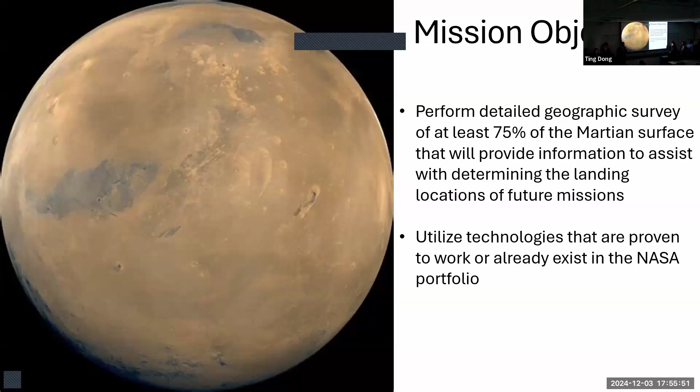Our mission objective is to perform a detailed geographic survey of at least 75% of the Martian surface that will provide information for future missions, primarily future manned missions, to choose landing locations. We are also abiding by AIAA's request for proposal, utilizing technologies that have been proven to work so that our mission will have a chance of success.

Our mission constraints are that our mission must not exceed $1 billion US. This includes the cost of materials, costs of testing, costs of launching, and costs of fuel, to ensure that our data will actually be helpful for future manned missions, when we intend to complete all of our measurements by December 31st, 2033. Our mission should remain operational at least until the late 2030s.

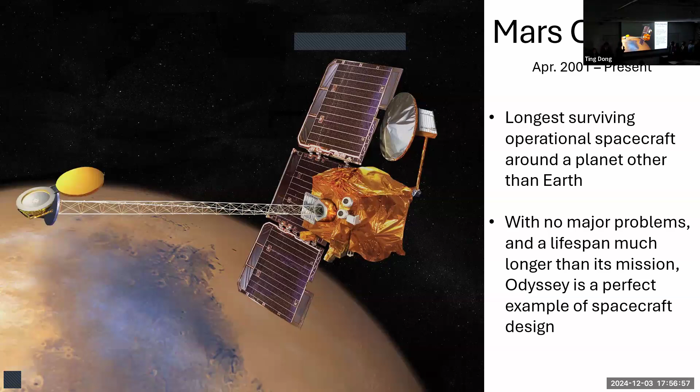Odyssey is one mission that we took inspiration from, as it is in continual orbit today. It is the longest surviving operational spacecraft around a planet other than Earth. Mars Odyssey doesn't really seem to have an end of life, and with the design of our spacecraft, we're hoping that it can outlast Mars Odyssey and provide extra information to Earth past its mission date.

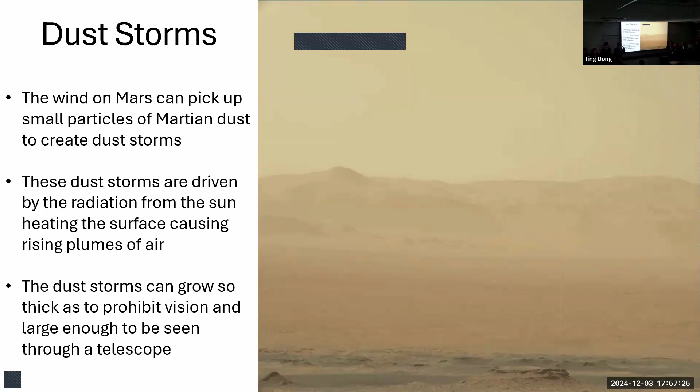Storms are probably the biggest hazard to our mission. The winds on Mars can pick up small particles of dust and fling them around, creating dust storms which impact visibility. This is going to be an issue for us since we are surveying the Martian surface from our satellite. These dust storms are driven basically by the same thing that drives them on Earth: solar radiation heats up the ground, causing warm and cold air to move and create wind.

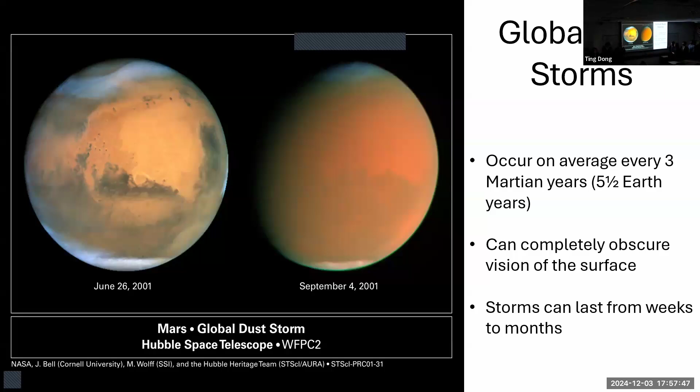These dust storms can grow significantly large, to the point of obscuring the entirety of the Martian surface. These global dust storms seem to occur on average every 3 Martian years, or 5.5 Earth years, and can last from weeks to months. This is why we plan to launch as soon as possible, so that when the dust storm does occur, we still have enough time to take all of our data.

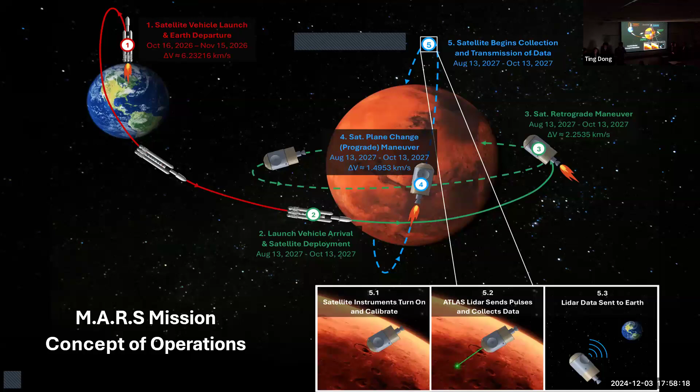We plan to launch from Earth in 2026, arrive at Mars sometime in 2027, perform a burn to slow us down and get us into Martian orbit, and from there a secondary burn to get us into our final orbit, where we will collect data using a LiDAR, a laser imaging device, which will shoot a laser down, the laser will bounce back, and we'll send that LiDAR data to Earth to get a topographical map of Mars.

So I'll be talking about the interplanetary trajectory. This will deal with anything from launch to getting into the correct parking orbit that we'll be using to measure with the LiDAR.

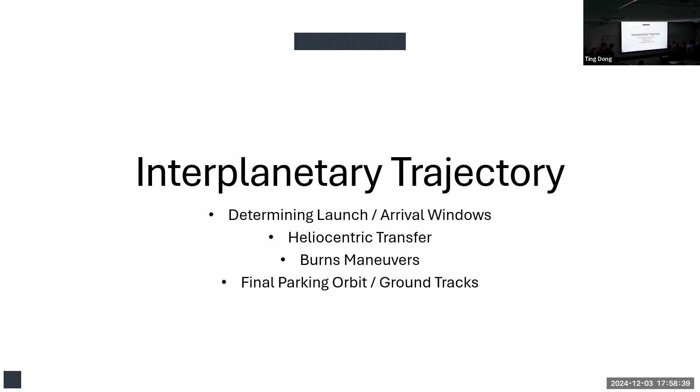We'll be performing a heliocentric transfer first to go from launch to reach Mars. Some considerations we had for this were the time required to achieve arrival, and then having enough time to actually fulfill the mission. Also the overall delta V, since a greater delta V means more fuel, along with the time range.

We decided on using the Falcon Heavy. We were originally deciding on the Falcon 9, but the payload happened to have a weight larger than what it could carry, so we used the Falcon Heavy, and it still remains one of the lowest costs for reaching Mars.

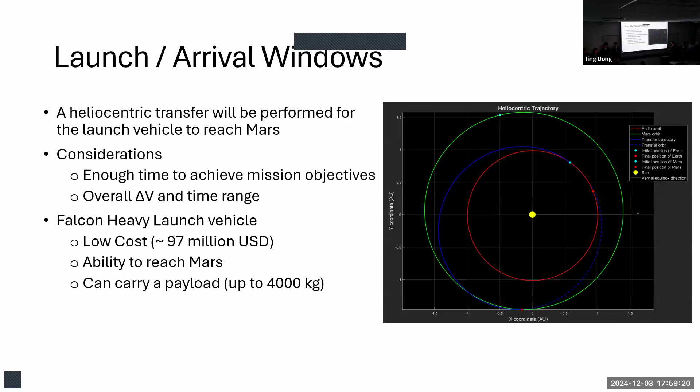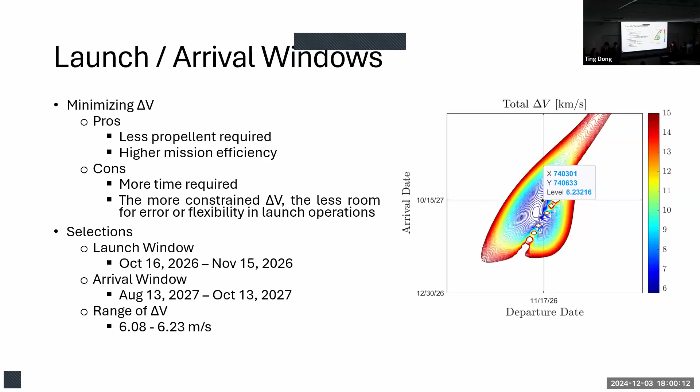On top of that, we have to have an arrival date a bit later than the earliest possible, because we decided on a larger contour. We had a launch window between October 16th and November 15th of 2026, and an arrival window between August 13th and October 13th of 2027. Our delta V's range from 6.08 to 6.23 kilometers per second, and we did most of our calculations using 6.23, since that's the worst case scenario.

So after we arrive at Mars, we'll have to transfer from a hyperbolic trajectory into a circular orbit.

We decided on a distance of 3,546.2 kilometers from Mars, or 150 kilometers from the surface. So our first delta V is going to be a retrograde maneuver, calculated using the speed at the hyperbolic trajectory at that desired distance for our parking orbit, minus the speed that we'll have within our circular orbit.

We will be performing a plane change maneuver to get into the right plane, so it's the most efficient and able to capture the most data the fastest. We'll be changing our plane from whatever our current orbit is into one that intersects with Mars's axis of rotation. We're assuming we're in the equatorial plane, since we don't know the exact plane we're in due to using patched conics, but we also considered the maximum inclination angle possible, which is 24.9 degrees. From those calculations, we got a delta V of 1.5 kilometers per second.

So our largest delta V is going to be in the retrograde maneuver.

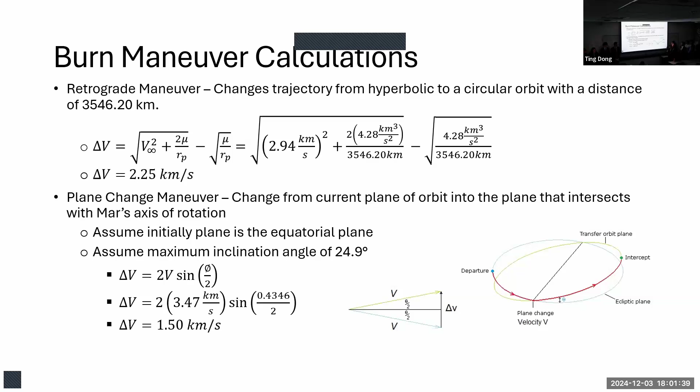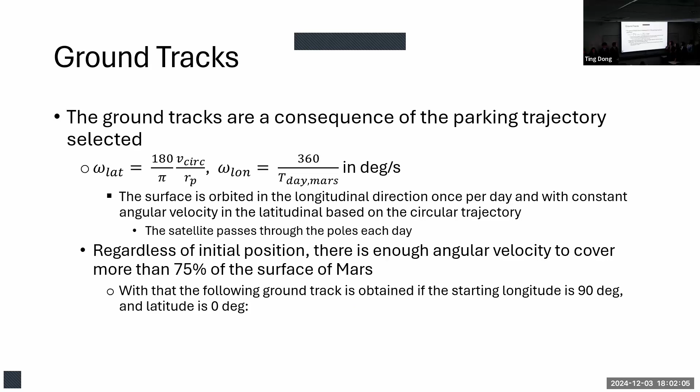For the ground tracks, we used the angular velocity in the latitude direction, which is the speed from the satellite, and the angular velocity in the longitudinal direction, which is the speed of the planet rotating about its axis. Using this, we found our satellite would be orbiting Mars around 14 times a day. Because of this, we can now see the ground tracks, and our mission of covering 75% will be covered well before the 2-year mark.

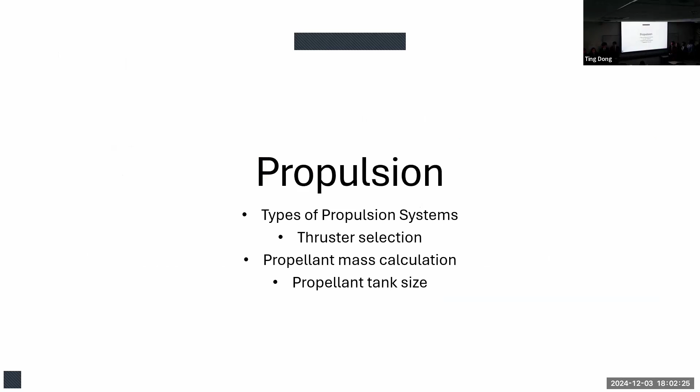Now I'll go over the propulsion systems for our mission. We'll be using two types of propulsion systems: a chemical one for the maneuver to lower the orbit as well as the plane change, because it has a high thrust impulse and is able to do rapid movements. We'll also be using electrical propulsion to make small adjustments throughout the mission after the satellite is in the parking orbit.

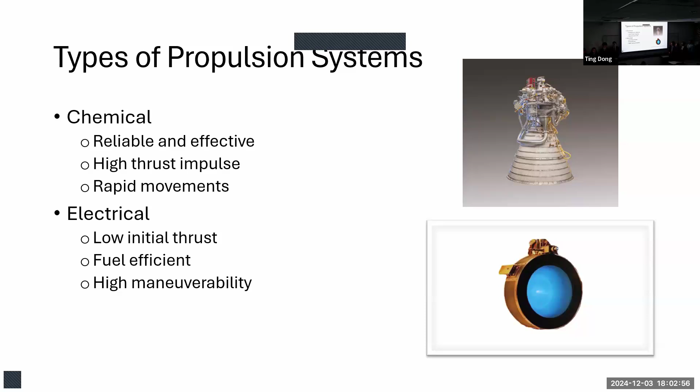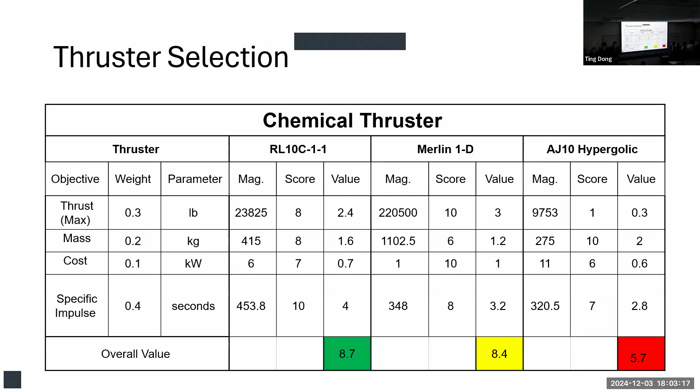For the chemical thruster, we compared the RL10C1, the Merlin 1D, and the AJ10 in terms of thrust, maximum thrust, mass, cost, and specific impulse. We determined that for our mission and the delta Vs calculated previously, the RL10C1 would be the best option. For the electrical ion thruster, we compared the NEXT, the NSTAR, and the BIT-3 on the same parameters, and concluded that for small adjustments, the NEXT would be more viable.

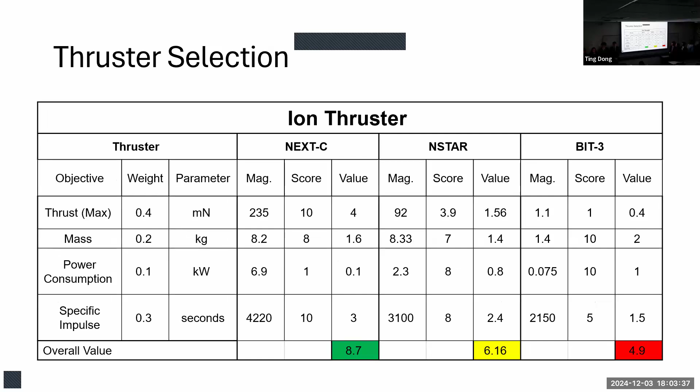Since we're using the RL10C, it uses a bipropellant system of hydrogen and oxygen. Knowing the mass of the satellite without fuel, as well as the delta V required and the specific impulse it provides, we calculated the mass of the propellant, and from there determined the mass for both the hydrogen and the oxygen.

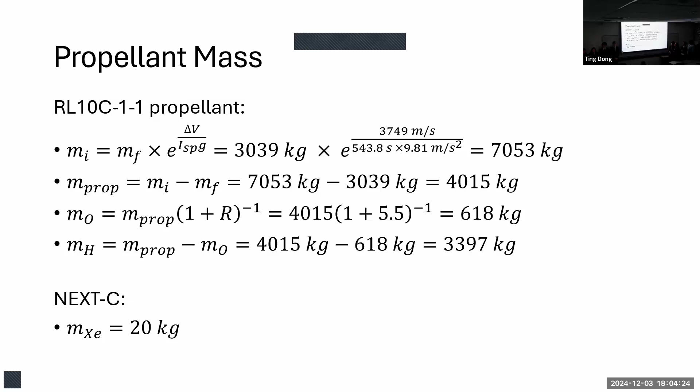For the NEXT-C, it uses xenon as the propellant, and comparing to other uses of this thruster, we determined that a mass of 20 kilograms would be enough for the length of our mission. From there, we calculated the propellant tank sizes we'll be using, which will be described further in the next section.

Now for the structural configuration, we ended up choosing a skin stringer configuration, as it allowed us to have the maximum possible spacing inside, and it has the best structural capabilities. We chose magnesium alloy due to its low density and high stiffness compared to other materials like aluminum.

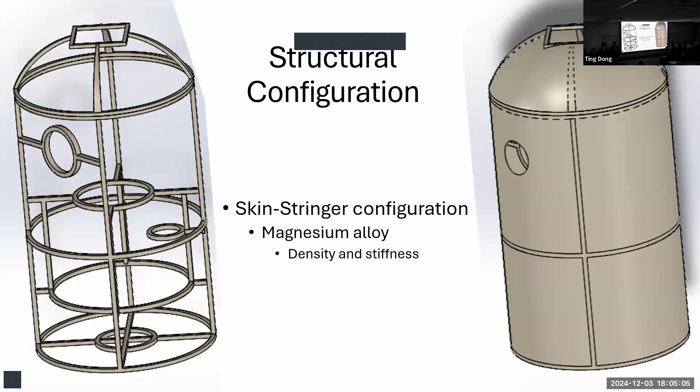Going back to the configuration for thrusters and propellant, we chose to have 3 tanks. The biggest one, on the bottom, is the liquid hydrogen tank; the smallest sphere is the liquid oxygen tank; and the other big sphere is the xenon tank. All three are made of carbon fiber with a thickness of around 5 millimeters. For the thrusters, the main thruster was located at the bottom of the satellite, and the two ion thrusters were located at special points, right at the connection between the hoop frame and the stringer, for better overall performance.

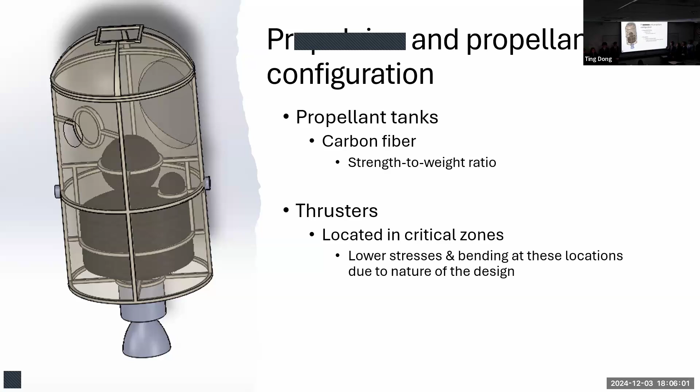Now, when talking about the nuclear reactor or the KRUSTY, this reactor has a mass very high for the radioactive mass, and that offsets our center of mass to around a third of the total height of the reactor. Because of this, we created a beam in between the stringers that would connect at that exact point to avoid any torsional stresses.

This also allowed us to have a better overall, easier connection to the radiator after this. To further on this, we're going to use a PAN graphite felt sheet to insulate this reactor from the overall frame.

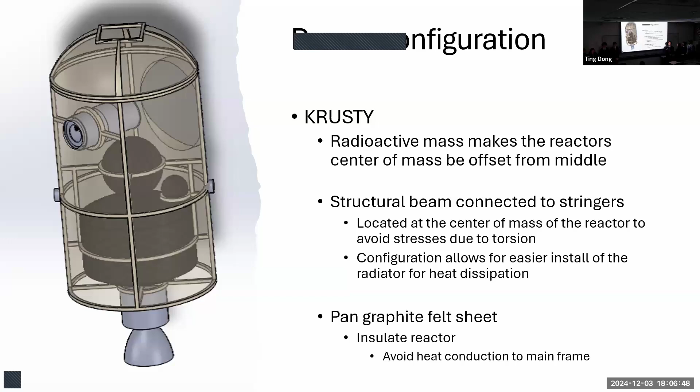Now, for the thermal configuration, as I said before, we're going to use the PAN graphite felt to insulate the reactor itself. We're also going to use some ceramic tape. Then ceramic spacers are going to be used between the actual radiator that's going to be connected to both the KRUSTY and the two ion thrusters.

Also, we're going to have a second radiator that's going to be attached to the bottom of the satellite. This radiator is going to be only for the RL10C, and it's only to avoid heat conduction to the main frame. Both of them are going to be made out of aluminum due to its good thermal dissipation, low absorptivity, and low density.

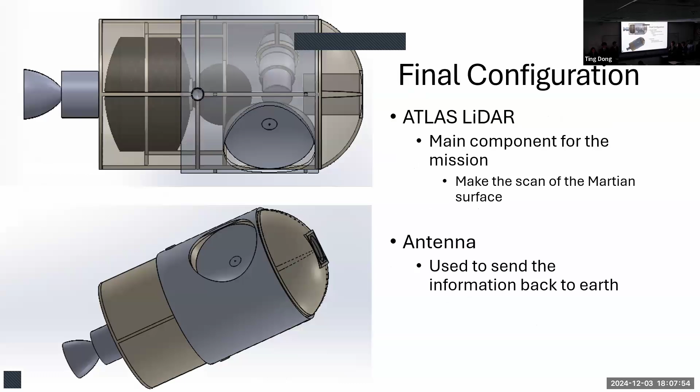Finally, we have the final configuration, which has the ATLAS LiDAR on the top. This is going to be, as said before, used to do all the mapping that we need, and the antenna used to communicate that information back to Earth. This is the overall configuration.

For that reason, we decided to weld the LiDAR to the frame shown here, to help prevent any shifting, because any shifting can cause the laser to shoot at a different angle than we might be expecting, and affect the data that we collected. Next, the antenna will also be welded for much the same reasons, to ensure consistent communication to the satellite.

Also, the large surface area through which it would be welded was chosen over bolting, since bolting might require a large amount of bolts, which would create stress concentrations.

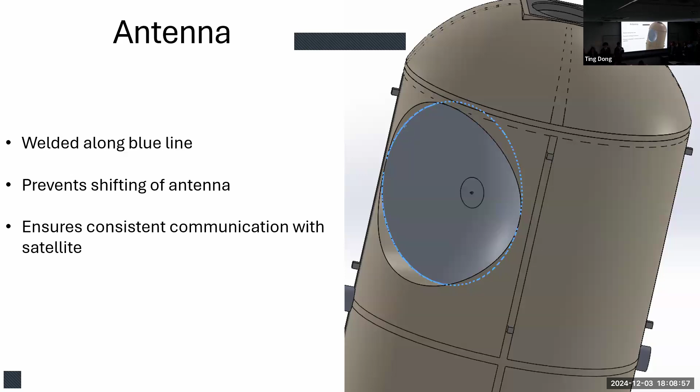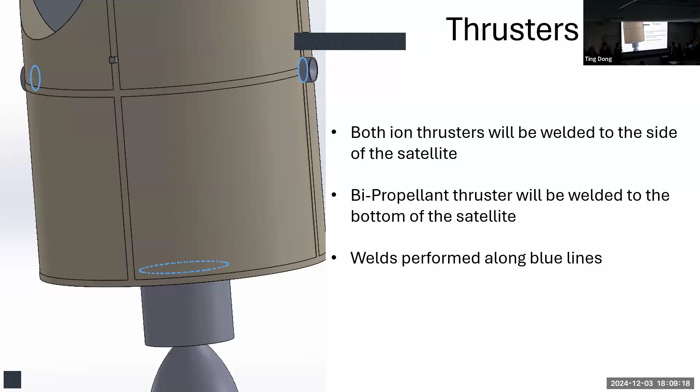The KRUSTY, because of the large amount of heat it passes, will not be welded directly. Instead, a frame will be welded onto the surface of the satellite, and then ceramic bolts will be driven through the circular frame and into a nut, which is welded onto the KRUSTY. This is to ensure that there is minimal heat transfer between the KRUSTY and the frame of the satellite.

The radiator is directly welded to the KRUSTY for the same reason, but in reverse, to ensure maximum heat transfer from the KRUSTY to the radiator, so that the radiator can do its job.

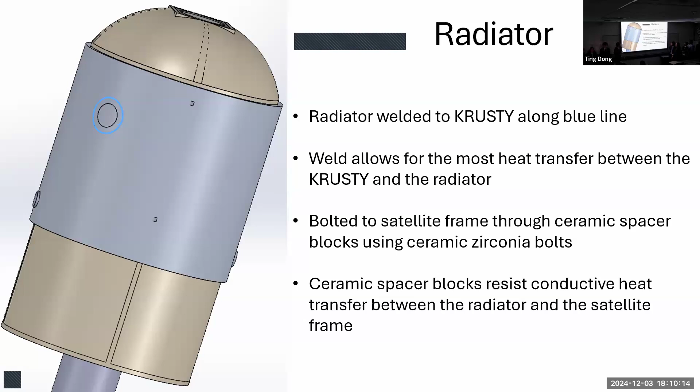The radiator, in order to stay in its position, will not only be welded to the KRUSTY, but small ceramic spacers will be placed between it and the frame and bolted through with, again, a ceramic bolt, to ensure that the heat transfer does not go into the frame.

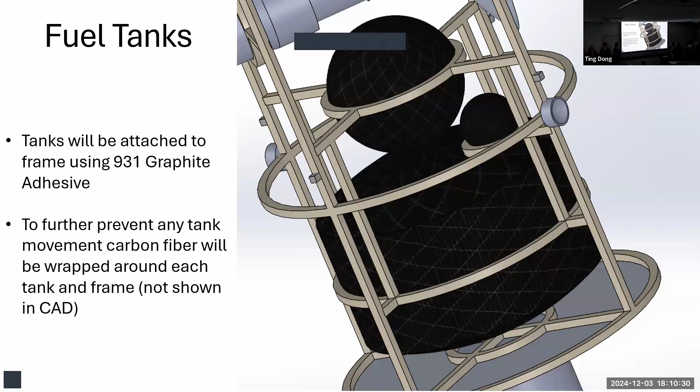The fuel tanks will be attached to the frame using a 931 graphite adhesive. To further prevent any tank movement, rather than just rely on the adhesive, fiber will be wrapped around the frame and the tank itself to make sure it holds in place.

Finally, the satellite skin will be attached to the satellite frame using rivets. This is basically just to prevent sunlight and debris from entering the interior of the satellite. The rivets are basically just a handy way of doing that without having to use welding or anything else, which is used extensively in the aerospace industry.

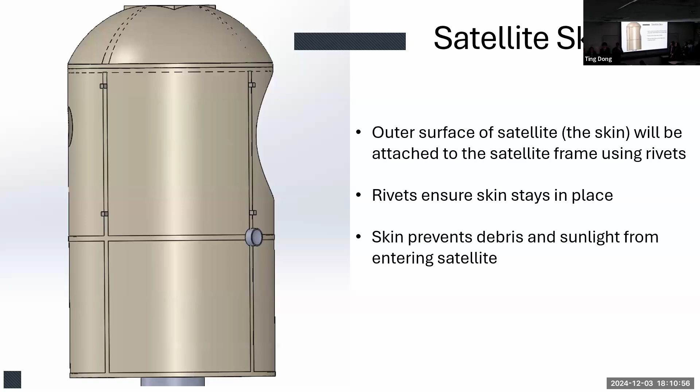So for structural analysis, we'll be talking mainly about the stresses conducted during the burns. The satellite undergoes the highest stresses during the burn maneuvers. We'll be focusing on both of them, but particularly the first one, since that happens to have a larger delta V. We'll also be focusing on the supporting beams attached to the thruster, since they're the part of the structure closest to the thruster, so they'll probably be the ones that endure the most stress.

We'll also be thinking about progressive failure, so from the first burn to the second burn, anything such as deformation that could cause new stresses to be introduced during the second burn.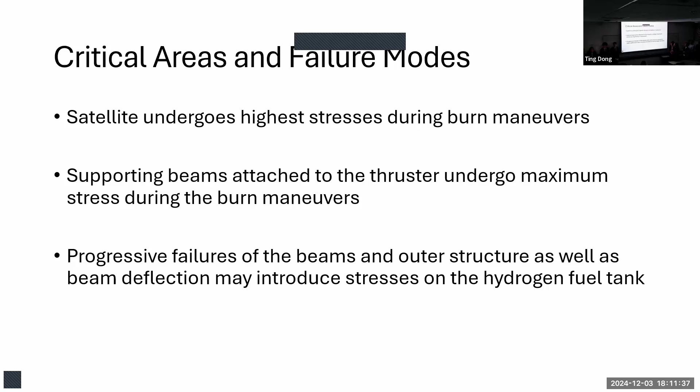One really critical location is on the supporting beams, exactly where the thruster attaches to the frame. Right there we have a force going upward, and the rest of the frame is considered rigid. If that's done, you will have transverse shear at some point in the section, and also bending stress. At the same time, we're not sure how the sectional geometry will behave.

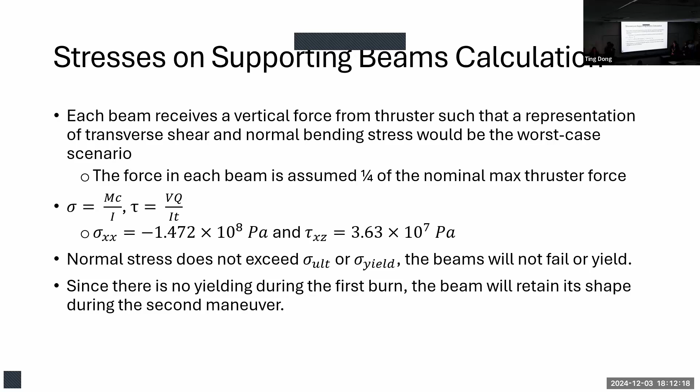So to put some rough bound into the stress matrix, we put in both bending stress and shear stress. After that's done, and thrust is applied, we'll see that it is below the yield strength of the material if you iterate over T. We found a thickness of the section to be 0.0108 meters.

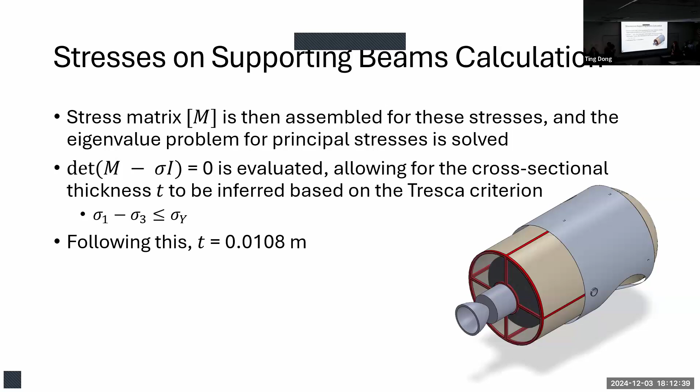Additionally, there could be a problem of fatiguing in those beams. If those beams were deformed too much, they would go up and touch the tanks above, which could cause catastrophic failure. During smooth burns, thrusters typically vary within 5% of nominal force, so there's some bounded variation in the force.

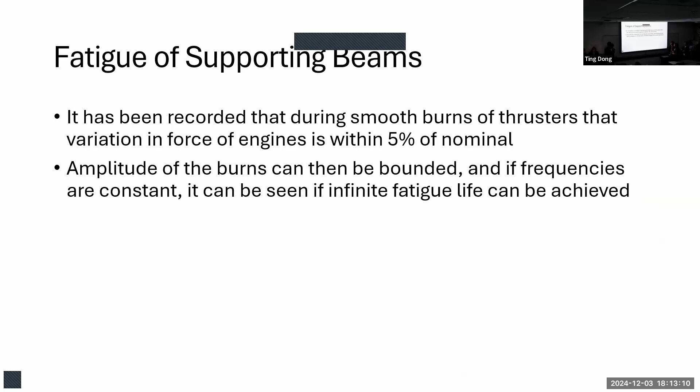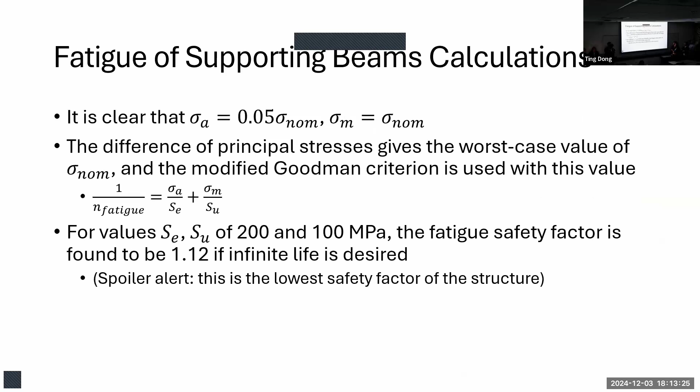At the same time, I have to assume that the frequency is constant to do this analysis and to see if infinite fatigue life can be achieved. Carrying this out, I do get infinite fatigue life, and a factor of safety of 1.12 is reached if this is done. This is the lowest safety factor of the structure.

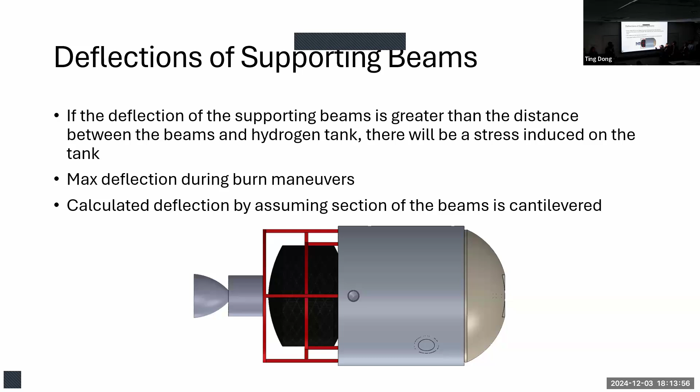We'll also be thinking about the deflections of the supporting beams. If you look here, you can see that the distance between that and the hydrogen tank is quite small, so if there is a deflection that's great enough, it could introduce new stress onto the hydrogen tank. We'll calculate this by assuming the beams at the end are cantilevered and that there will be a max deflection during the burn maneuver, so we're assuming it's going to be the max deflection.

So here we did the calculation. As you can see, we basically assume that all four of these are cantilevered beams. In order to calculate, we assumed that a fourth of the force created by the thruster is acting on this cantilevered beam, and we assumed it's distributed because we had no way of calculating how the force is acting specifically on the beam.

We calculated by finding the location that would be acting if it were a point force, and we found that the maximum value would be 0.83 centimeters, which is less than the distance we have between our hydrogen tank and beams, so we'll be able to account for that.

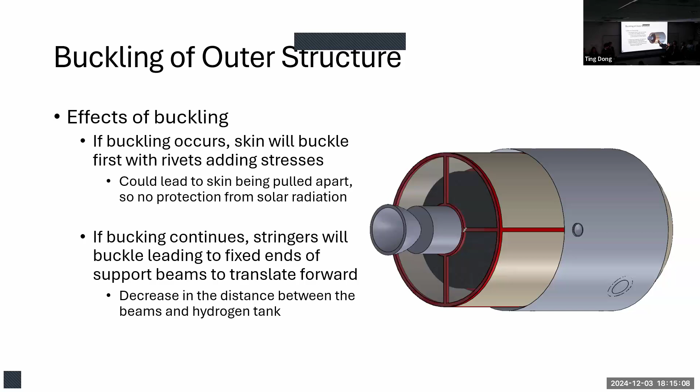We were also thinking about buckling, because if the structure buckles, not only will there be stresses introduced onto the skin that could cause it to be pulled apart, but on top of that, the hydrogen tank becomes more susceptible to stresses as well, because this whole circular frame moves closer to it, and so do the beams. So here we did the buckling calculations.

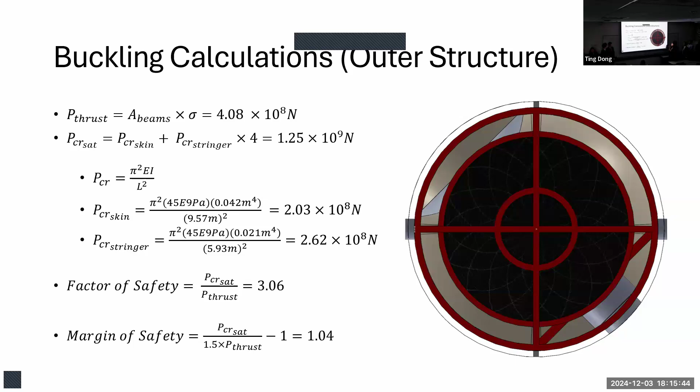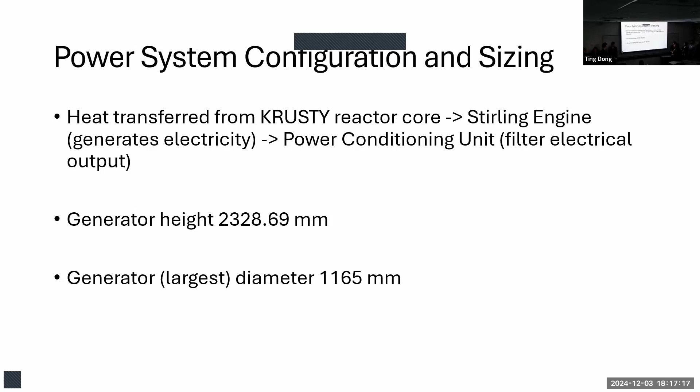For the power management and distribution, we have a modular power distribution unit separated into three components: the power electronics and building blocks, the modular converters and switchgear, and the modular systems. Using additional testing to verify, we plan on using a multiple ring bus distribution system to distribute power throughout the systems in our satellite.

So for thermal systems, there are several main considerations: the thermonuclear generator itself, solar background radiation, propulsion - both the thrusters - and then the LiDAR.

The KRUSTY is the main source of rejected power, generating approximately 10 kilowatts of power that needs to be removed from the system. The simplest solution is to insulate the reactor from the inside and attach it directly to the radiator, which will radiate out that heat. This radiator was sized using the formula below, assuming all the heat flux is being converted and radiated out. There is some conduction going on, but that's assumed to be sufficiently insulated by the pan graphite. Using this, we found an area of 36.87 meters squared.

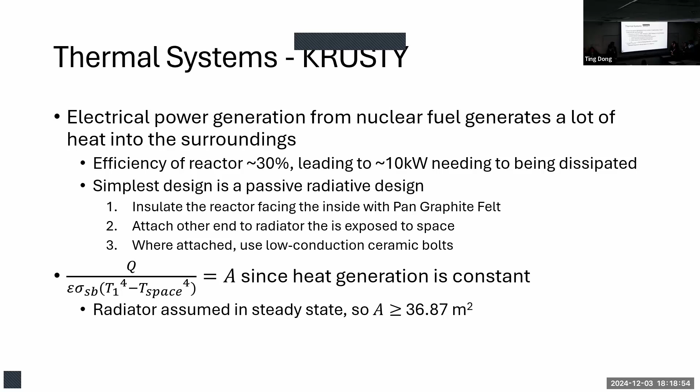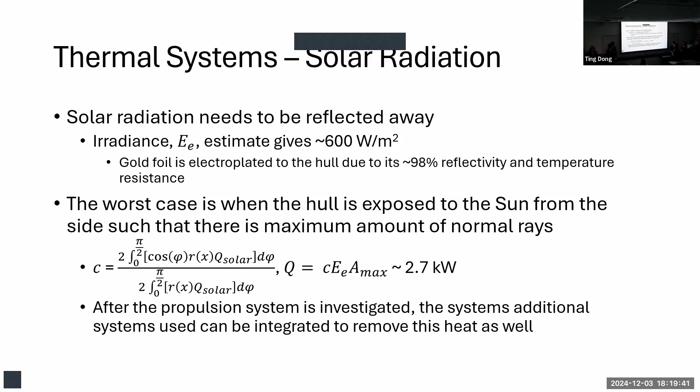Additionally, another consideration is solar radiation. There is some irradiance from the sun, and to shield the system, it's easiest to put graphite or gold foil on top of the hull. The worst case is when the sun is shining such that the maximum amount of rays is normal to the hull. At the same time, the hull is curved, so you can correct for that curvature since not all the power would be going directly into the hull. Doing this, you get a Q of approximately 2.7 kilowatts. This issue can be investigated later with the propulsion system in tandem, since there may be additional need for active systems.

The issue with the thrusters is that they do not give a constant heat flux, and their temperature ranges are almost never itemized. The patched solution right now is to take a heating plate onto the back, which will conduct away necessary heat, but testing needs to be done to determine a suitable cooling system. This can be integrated with the solar issue later. Ion thrusters, since they're directly touching the radiator, can be assumed to be conducting into it, and can be addressed similarly to the KRUSTY. This makes the total area 41.3 meters squared.

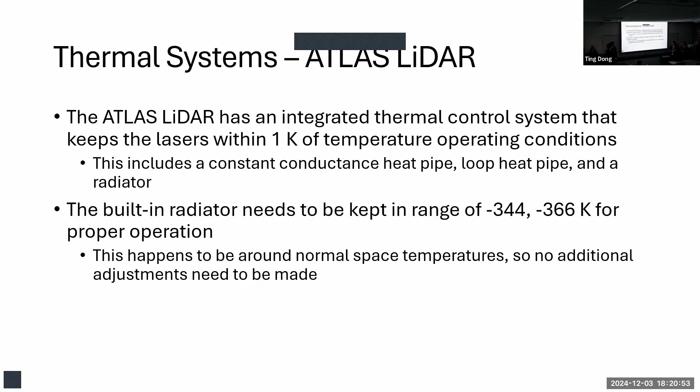And the final system is the LiDAR system. The LiDAR on its own has a built-in thermal control system, which operates at roughly space temperatures on the radiator side, so no additional consideration needs to be made there.

The total mass of the satellite can be split into 5 main categories: instruments weighing up to 900 kilograms, tanks and fuel with tanks weighing 400 and fuel 4,000, structures including all frames and skin weighing up to 1.1 thousand kilograms, thermal control mentioned in the last section at around 160 kilograms, and fastening including tapes, rivets, and bolts adding up to 3 kilograms, with a total of 6.7 thousand kilograms.

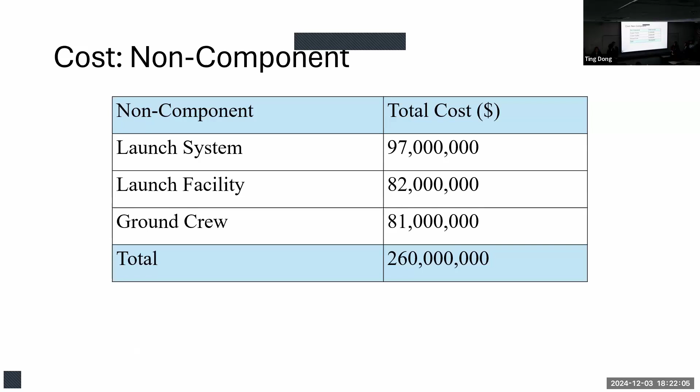For the cost, we have it broken down by component, which totaled to around $54.4 million. For the non-component costs, we have the launch systems, launch facility, and ground crew, estimated to be around 260 million. We have a complete cost breakdown with components, non-components, as well as testing and manufacturing. For testing we allotted 50 million, and for manufacturing we allotted 100 million. It came out to a total of $464,412,000. That concludes our presentation.

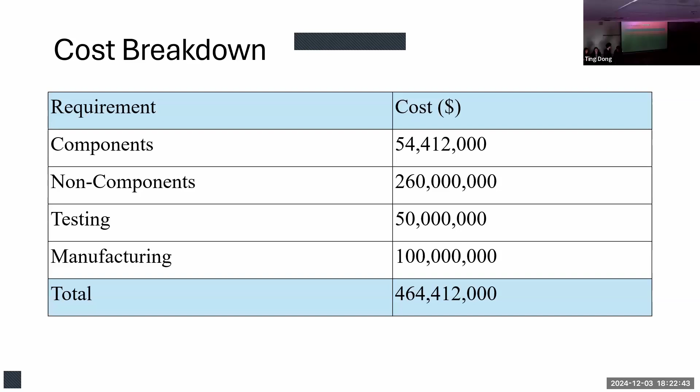Yeah, I've got a few. I don't want to step on somebody else if they've got some, but I've got a few. Oh, it's okay, you can go ahead.

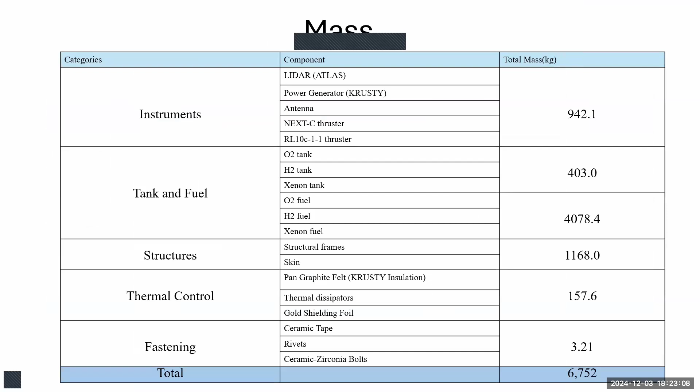Okay, so at the very beginning, when you were talking about your delta V requirements, I apologize, your slide numbers seem to be behind a little black and gray square, so I'm not clear. I assume there's slide numbers in the bottom left, and I just can't see them.

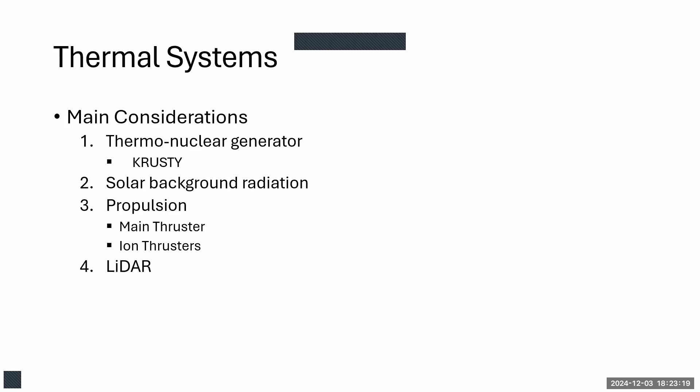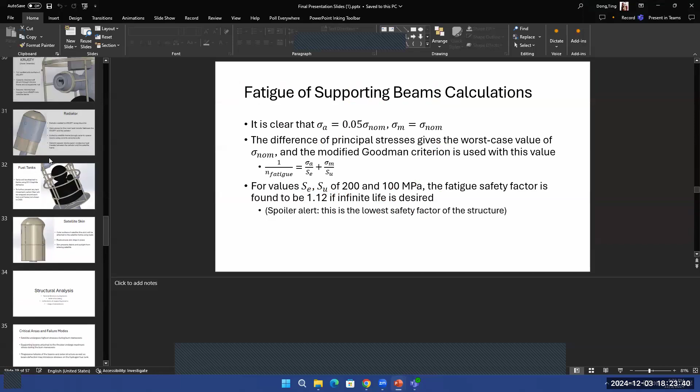We don't have... go faster. I don't know why it's doing that. You might want to just exit it and just click it through. Yeah, it was somewhere in the first like 4 or 5 slides, probably. No, it's probably the con-ops. Not sure. Is it this one? No, it was just a text slide, I believe.

Somewhere where you'd mentioned like 6 meters per second delta V. Yeah, here, oh yeah, this one.

When you're talking about your range at delta V, are the units on that right? Are we talking about the difference in meters per second of delta V? Yeah, it was supposed to be kilometers per second. Okay, I thought that might be the case. So check your units, and as you're talking through the presentation, that should raise a red flag for you, just like it raised a red flag for me.

Like, oh yeah, there's something wrong here, and if you need to correct it on the fly, then do that. I think maybe on the next slide when you're talking about the inclination of the orbits - here we're talking about assuming a maximum inclination angle of 24.9. That's the inclination of the orbit that you're arriving at Mars in. That's the plane change maneuver that we want to make. We assume that because we want to get into...

So basically the 24.9, it's the inclination of Mars that it has over the equatorial plane for Mars specifically. Yeah, so just like Earth is tilted 23 whatever degrees, Mars is 24.9.

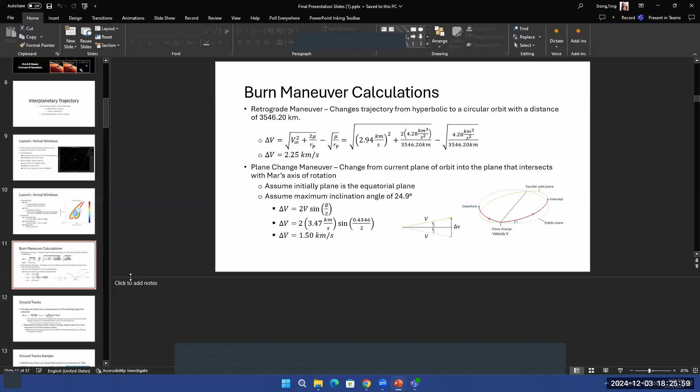I mean, it seems like from the perspective of the ecliptic plane, you don't have to be very far out of it to come into Mars basically on a polar orbit trajectory, right? Like you'd have to be, you know, 0.0001 degrees inclined relative to the ecliptic, and then you're shooting over the pole of Mars, right? So I'm not super familiar with the realities of orbital mechanics, but it seems like you could maybe be coming in at an inclination angle more than that. And if you're telling me you want to come in at a polar angle, maybe...

Well, that's beneficial to you. That's the angle at which we will be basically arriving. After that, we do the plane change maneuver, and that should basically bring us to the polar trajectory. So you're saying, well, if you're talking about getting to a polar orbit from that, you're talking about doing an inclination change of what, 65 degrees?

So if you come in at a smaller inclination angle, would you maybe have to do a larger plane change? To do it, coming in from the equator would be the highest angle of the plane change, since... yeah, and you wouldn't have to be very far out of the ecliptic plane to come in basically on an equatorial plane around Mars.

So that's what I'm getting at, maybe - if you're talking about doing a conservative analysis, then I think we ought to be using the 24.9 degrees. We accounted for that by doing more than the 75% that was required, even if we're losing a couple degrees due to the shape of the planet itself, we'll still be covering more than 75%, even if we're not all the way there. So basically if we arrive at 0 instead of 24.9, we will still be covering more than 75%.

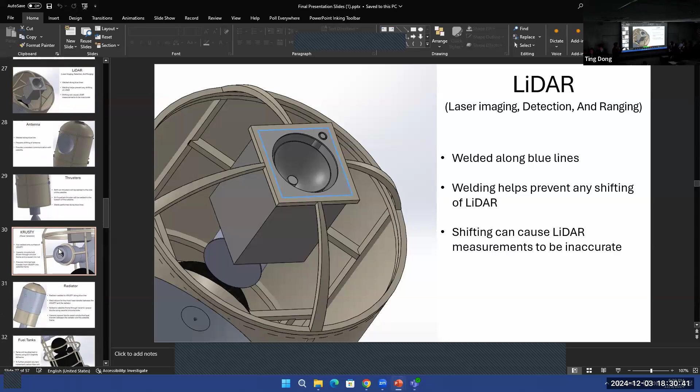Yeah, and I'll tell you that I'm not familiar with using ceramic bolts. That's pretty exotic to me. I believe it can be done. It certainly makes sense for the type of application you want to use, but it's not something I'm familiar with, so I'm not going to really speak one way or the other on that.

Assuming basically, to be the most conservative we could, we were assuming the maximum heat that the KRUSTY would produce would go into the radiator and then through the bolts. So we wanted a bolt that would stand really high temperatures, and the ceramic bolts were the only ones we could find. And from what we could tell from online sources, the tensile strength of the bolts themselves should be enough to deal with any stresses. So we figured it's a real choice, but it was kind of the only choice we had for the heat transfer.

I frankly wouldn't be so concerned about the strength of the bolts, but more so about fracture of the bolts. Ceramic tends to be brittle, and if there's some small crack in there, you put it under tensile load, and all of a sudden it's potentially going to propagate. But again, it's kind of an exotic application to me, and I'm not that familiar with it, so I'm not going to say that it can't be done.

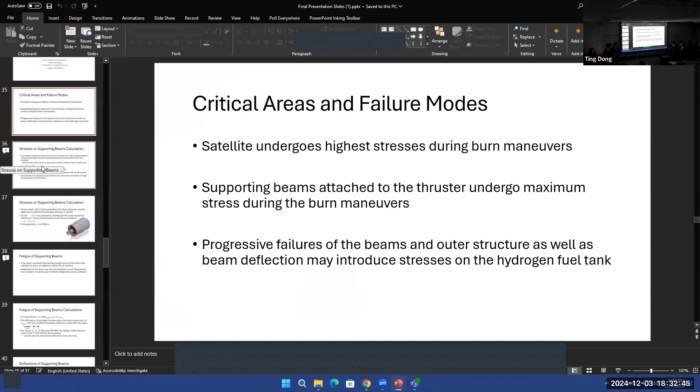So we basically did our failure analysis during the two burns, and we focused mainly on the first burn, since that would be where our beams would be enduring the most stress.

I'm curious, did you consider the launch environments on your system? No, because we didn't know how much the vibrations and stuff would be for launch. We'd expect to find that through testing. Yeah, I would expect that that's probably going to size a lot of the structure in your system. The launch environments, if you're launching on something like a Falcon rocket, you've got significant G loading, both static load and dynamic load going on.

So definitely consider that. But given what we did, when you're presenting a stress analysis like this, I'm a simple guy and I like to see pictures. So definitely show me a picture of what you're analyzing, the load that's on it, and you're doing a beam analysis, right? MC over I, VQ over IT. So I want to see a picture of the cross section of the beam.

And then so we got that kind of on the next slide, on slide 37 here. Looking at this picture, from a structure standpoint, this is a super structurally inefficient way to attach your engine. I'd like to see some sort of angled support in there, so you're not trying to take all that load through a flat plate and beam it out through a not very stiff connection to the outer structure of your satellite. Do you have room in there at the back end to put a triangulating diagonal piece between the rim of that inner donut hole and the outer rim of the satellite?

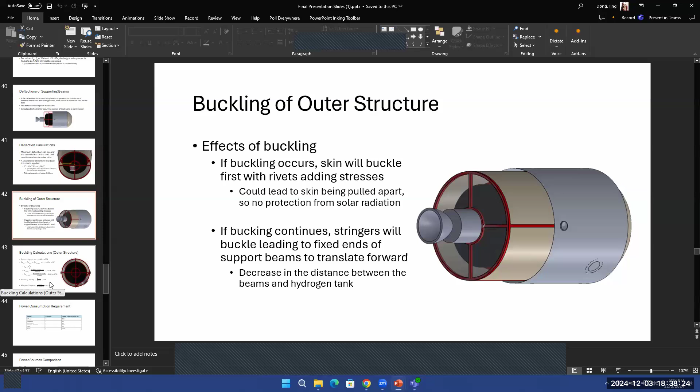Yes, so we considered that because we have rivets that attach from the stringer structure to the skin, but we can just consider the stringers itself.

So what I would say to that is your skin is going to behave somewhere between tube buckling, like Euler buckling, and flat sheet buckling. There's a lot of good NASA documentation about how curved stiffened structures buckle. It's probably overkill for a capstone design project like this. I think you've done a lot of good structures work here, probably more than you're showing. But be aware that you can find a lot of data on how structures like this buckle, and it's not as simple as just saying you've got an Euler buckling column.

Where I'm looking at a load acting on a cross section of a tube, right, the buckling modes are going to be significantly more complicated. But I think if you idealize it and say all the load is going to be carried by the stringers, that's a conservative approach, a good way to say we don't care what happens to the skin. It can buckle and we're not relying on it to carry load. But again, I like that you're thinking along the lines of buckling - that's something a lot of teams overlook in projects like this.

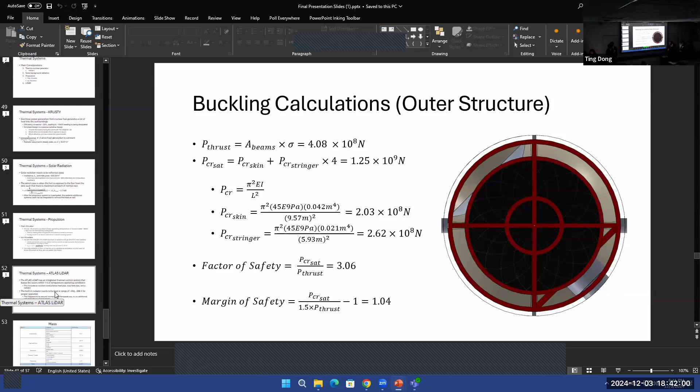So it has been done, and usually the standard is to use multi-layer insulation, but at the same time you want to conduct out the heat generated by the crucible in case there's some problem with the pan graphite felt. And if I use that, I'd be insulating all the heat inside, and it could cause heat buildup.

Okay, so you're kind of relying on the fact that you're conducting heat out through the skin, but we just talked about your skin not touching anything, so I guess I'm a little confused. No, so it's electroplated to the hull, but its purpose is only to reflect the solar radiation - it's not connecting or bridging the radiator and the frame and the skin.

Okay, I'm just wondering because I'm not super familiar with how this is done, but I almost think that bonding it to the skin means it's going to conduct heat into the satellite, maybe that it's absorbing from the sun. So you're thinking it's rather more... Oh I see, yeah, rather than like heating - if there was a vacuum gap between it and it was only touching at discrete points, then the insulation would heat up and radiate more effectively. If you're bonding, everything heats up, and maybe it still radiates as effectively.

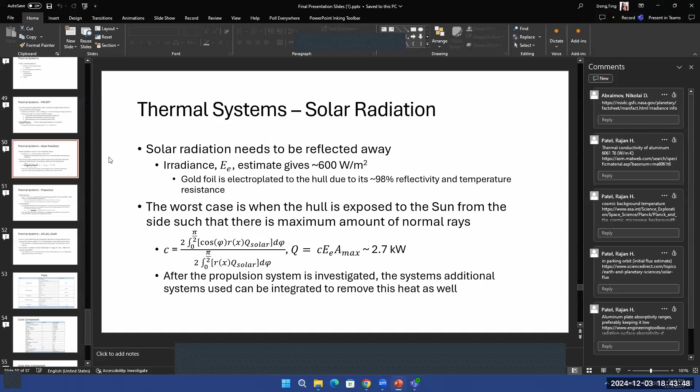Let's see, and then you had a slide breaking down the mass by system.

But what's your mass budget, by the way? Our mass budget, I think it would be the maximum that... our total budget, it's less than 500 million, so we still have like half left. No, I'm sorry, mass budget. Come on, what mass, how much mass were you targeting? Oh, it's the most that Falcon Heavy can carry, which is... it's on the slide, okay.

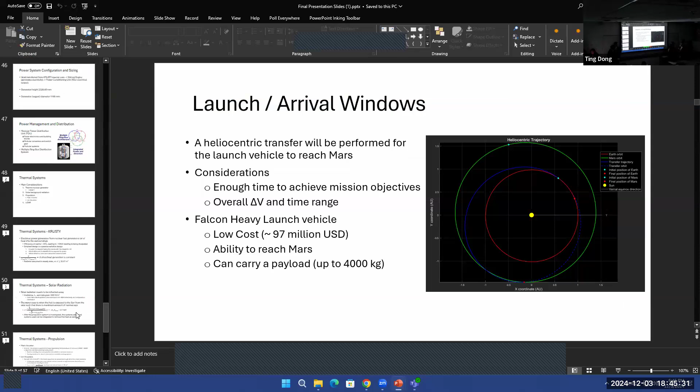It's up to 4,000 kilograms. And what were you on the previous slide? So you're 60-70% above your mass budget. I'm pretty sure I wrote the wrong thing. I wrote it for Falcon 9, not for Falcon Heavy.

Okay, definitely figure that out, because if you get a 40% shed of your weight, that's a big haircut, right? It shouldn't be 4,000, it should be 16,000. Yeah, okay, we went back and forth between Falcon 9 and Falcon Heavy quite a few times, so probably that was one that we missed.

Okay, yeah, that's definitely something to keep very good track of. I'll say, anywhere in whether it's aviation or space, mass only grows as your systems become more mature, so expect whatever number you have at this stage to go up. It's probably pretty typical, just like you have a management reserve in budget, to have a management reserve in mass, and say we expect to grow by 10-15% on our mass. So make sure that wherever we're at in our initial design, we're 15% below our maximum, whatever the mission maximum is, above which we don't have a vehicle or can't launch to Mars, or whatever the constraint is. Give yourself like 15% of that, and track it throughout the life of the program.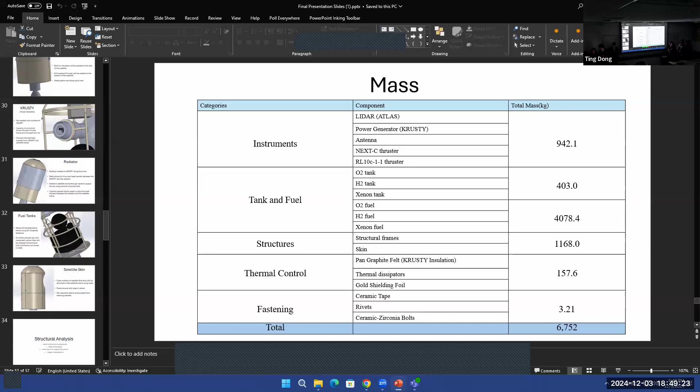Thank you. Thank you. Any question? Yeah, do you guys not have pressure in tanks? No, we do have them. You do have them, where are they? Just show this one. Yeah, we have them here. Well, aren't those your main tanks for your Xenon, your H2? Or do you mean intermediate tanks? So for the bipropellant, it has to be pressure fed so we don't get backflow through the engine and blow up our pressure tanks, right? So that we ensure flow is going in. So either you're pressurizing your main tanks to a very high bar, or you're using pressurizing tanks to pressurize it as fuel goes down?

As the design stands, it doesn't have them, but we really took into account what SpaceX is doing with their carbon fiber, their 12-meter carbon fiber tanks. We just overestimated the amount - they're using a 4 millimeter thickness, so we overestimated and used 5 millimeter thickness for it.

I'm asking how we ensure that we have positive pressure flow to the engine. So as you burn through your fuel, that pressure in there, even if you can pressurize it high with the carbon fiber tanks, which are newer and lightweight, as you burn through all of your fuel, that pressure is going to get lower and lower, to where you might not have your pumps able to circulate your propellants to the engine.

I think that's definitely something we should probably consider when we go back to fix some things. Thanks for the information. Any other questions?

I got one. You guys were talking about one of your considerations against using solar being the deployment of the panels, but then you were talking about the deployment of a radiator. How does your radiator system work? The radiator is not deployed, it's already part of the structure itself, so it'll always be radiating heat, yes.

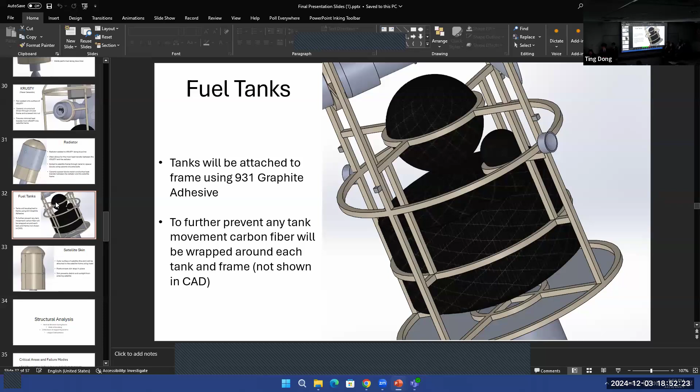So yeah, most of the power goes to the NEXT-C thrusters. They're used at the minimum possible power they can use. But we do need a constant power supply for the LiDAR, and it needs to be stable, it cannot wiggle. That's why we ended up choosing the reactor instead of solar, because if we're on the other side where we are not receiving sunlight, we don't want to have those issues with lower peaks.

I was just wondering, with such a low watt consumption, how did you guys weigh your decision matrix to go with nuclear? Because nuclear typically generates a lot of power for what we see is very expensive and very heavy. What specifically made you go with nuclear instead of just solar and batteries?

So the nuclear reactor we used generates 10 kilowatts, but out of that, I think it's about 3 kilowatts that are usable for our things. We decided on that because that would work best for being able to maintain the power for everything. We basically assumed if we had to use everything, including the LiDAR and the thrusters all at once, that it would be able to meet that threshold. And since the amount of output is slightly greater than our power consumption, we don't need an external source to store that power.

Also, we're going to be too low in the atmosphere, so we don't want to have to deal with any solar radiation force bringing us down, basically. Where are you guys orbiting at? 100...

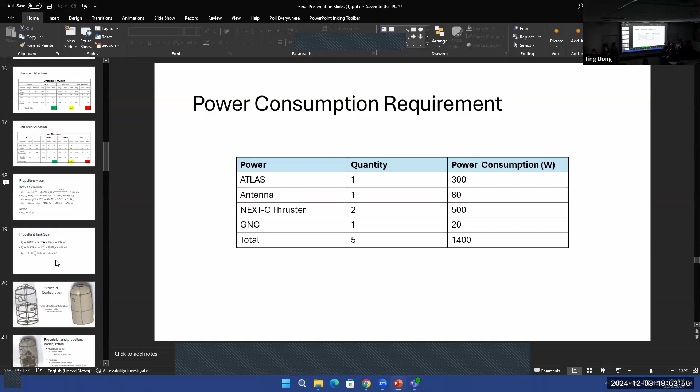Should be right before, higher. Right before, yeah, that's from the center. It's 150 kilometers from the surface.

Did you determine that to be where you're going to be getting significant effects from the atmosphere, and that's why? That's exactly where we're going to avoid any kind of dust storm, and the closest we are, the better resolution we're going to get with the laser. So that's the best threshold we could find to actually go to. So that's why solar wasn't an option.

You can find other ones by searching kilopower reactors, and that's the only one that is actually being constantly tested and used. We were able to find a constant temperature, so they tested it at the highest amount of power or the lowest amount, and it roughly came out to 800 Celsius, if I remember correctly. Yeah, 800 Celsius. So since we're actually going to always be using less, even in our max conditions, we assumed for our temperature stuff and our insulation it'd be based on that. We were able to do this because since it's still something relatively new, it's hard to find temperature conditions when it's operating, and this one had thorough documentation on that.

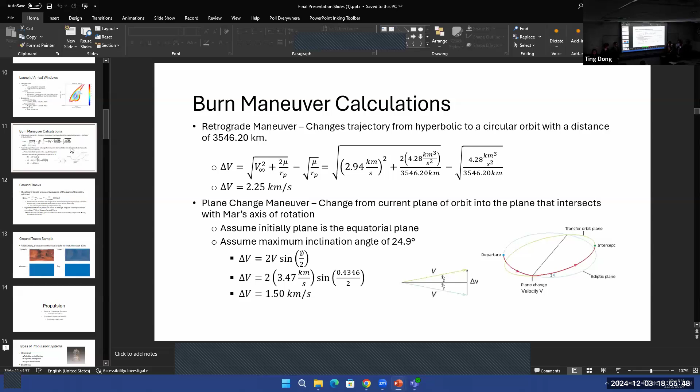Oh, could you go to your propulsion selection slide? Just going through the engines, I think that first one, yeah, the thrust was just in pounds instead of newtons. Sorry, we had the same engine, so the numbers seemed a little weird at first. I think that's all of my questions. It's a good engine. It's good.

You guys have enough questions? No. Could you go to one of your CAD models? Oh, sorry, it would help to give you the microphone.

Go to just one with the ion thrusters, and I guess the general question is, what sort of functionality do those ion thrusters provide for you guys? They're mainly for perturbations or other supplemental things. And then why did you decide to just do two of them along one of the diagonals and not four? Well, they're offset from the middle, so we thought that with two we could rotate it as we need and use it as we need.

And you think two would be able to provide you enough thrust to overcome whatever perturbations you have, even if you're pretty close to the top of the atmosphere? Our assumption is that where we're orbiting should be basically the closest we can be to have basically no atmosphere, so the only perturbations we're worrying about are almost primarily gravitational effects. Okay, so it should be able to. And they're already pretty small, so the perturbations were on a lot of magnitudes smaller than Mars itself, so it was basically just supplemental, as I said. Awesome.

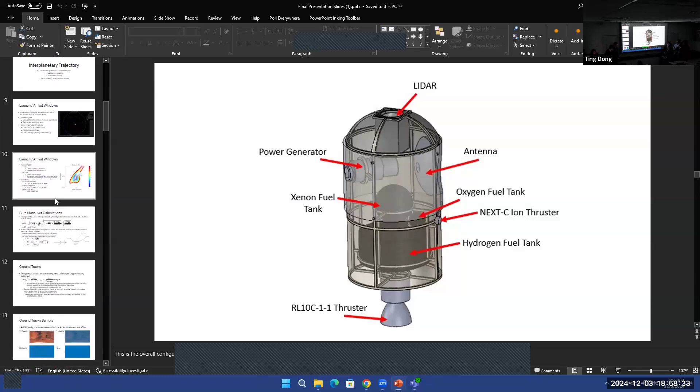So the first one is the thruster selection. Let's give some chance for you guys to talk, because I feel like you guys really didn't talk for the whole presentation and Q&A. So the first one is that your thrust, they're really in different order of magnitudes, and I feel like you are choosing the thruster there, the general thruster really in different order of magnitude. I would say, what is your expectation before you chose this one for the thrust?

Well, I would say the specific impulse obviously is optimal in this regard. Let's focus on thrust. So for the thrust part, since there's so much difference in these three options, I want to know what is your expectation of the thrust you want your thrust to have? So a lot of time, I'm not an expert in this propulsion system, but I feel like it's not really- I mean the mass, lower is better, cost, lower is better. But for the thrust, is it really that the higher the better, or are they really in different order of magnitude? I mean, there should be...

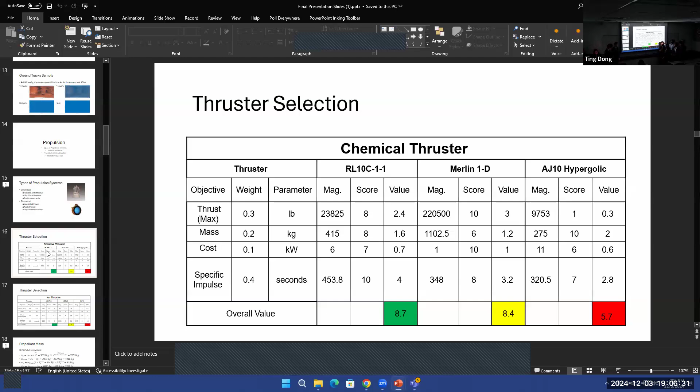The next one is the structure configuration. Let's give them an opportunity to talk first.

For the skin stringer configuration, you chose the magnesium alloy because of density and stiffness. Yeah, that's the reason.

Let's look at the big picture. We do structure, we chose the material for structure, and I'm just a little surprised to see that you chose this material because of density and stiffness. I just need some justification.

In terms of aluminum comparison, magnesium does prove to have better stiffness properties, and that is important for the structure of the satellite itself. Compared to aluminum, the magnesium alloy offers lower density and better stiffness. So that's the reason why we chose it.

So you consider density and stiffness more important criteria for choosing the material for structure than, let's say, strength to weight ratio? That's what I was going to say. It's explaining that you're worrying about deflection first, then structure failure. Is that what I mean?

Because stiffness is for calculating deflection, right? What is stiffness for? The higher the stiffness, the less deflection there is. What else? Yeah, we're right about the strength to weight ratio, and that's why we chose it over aluminum, because it was slightly better.

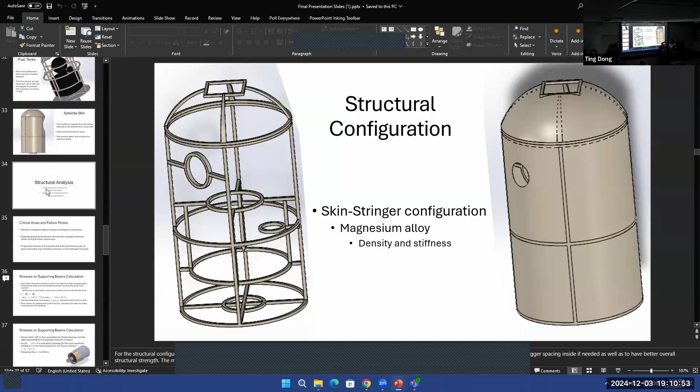I guess that was kind of like a directional type of thing, a nominal way that we assumed. For the stress, we just assumed that the thruster would cause a bending in a certain direction. So I don't know. If we're using the frame of the satellite as a reference, then...

To answer my question, my question was the negative sign. What's negative? Compression, and that's why. Compression, yeah. But we're not using positive value. Yeah, we should use the magnitude for... I'm not saying that you should use it, I just need some explanation why use a negative value.

Yeah, it's just a bending sign convention. Sign convention? What do you mean by sign convention in bending? Typically tension is reported positive, compression is negative for sign convention. Yeah, I know that, but my question is why put a negative sign here? I know positive is tensile, negative is compression, of course I know that.

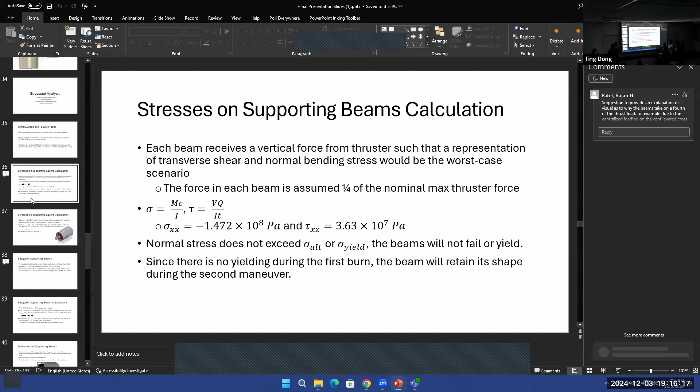Thickness of the support beams. Yeah, because I heard you guys said in the previous Q&A with Tom it's a tube, square tube, rectangular tube, right? So is it the dimension of the tube or the thickness of the material?

I'm not sure. So let's say this is a tube. Is it this dimension or this dimension? Is it the thickness of the tube or this dimension? Yeah, it's the thickness - it will be the difference between the inside diameter and outside diameter. So your thickness, yeah.

10 millimeter. Wow. You had to go through several iterations. Yeah, I think if we do exactly what he was saying, putting the diagonal corners, it would likely reduce them. Okay, because then you'd have that smaller bending stress.

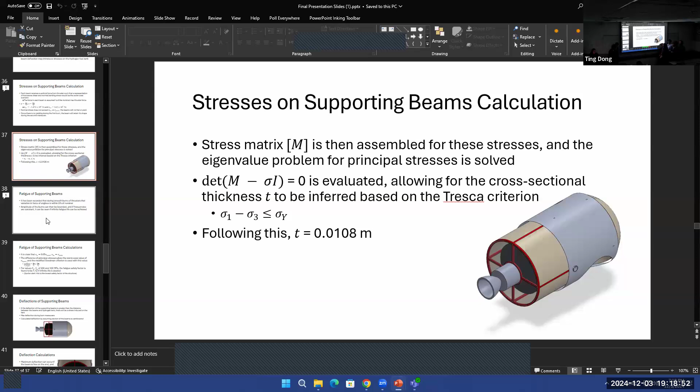The direction is correct because that distributed load is coming directly from the thruster itself, so it's only acting on that area, so the deflection - directional force. Yeah, I would say it is.

It looks a little weird for me, because based on your structure, this is a circle, okay, and you have the engine installed here. The direction should be in this direction, yeah, but the one you put is in this direction. You know what I mean?

This image is slanted, it's actually meant to clearly show your force direction is in this direction. You should have put the force arrows diagonal to show what's going on. You guys are smart, you could figure out a way to demonstrate direction this way.

The only problem with that was that we couldn't show the beam itself, that's why we basically showed it like that. You think it would be better, because diagonals - like drawing a circle and putting a dot there, kind of like in physics.

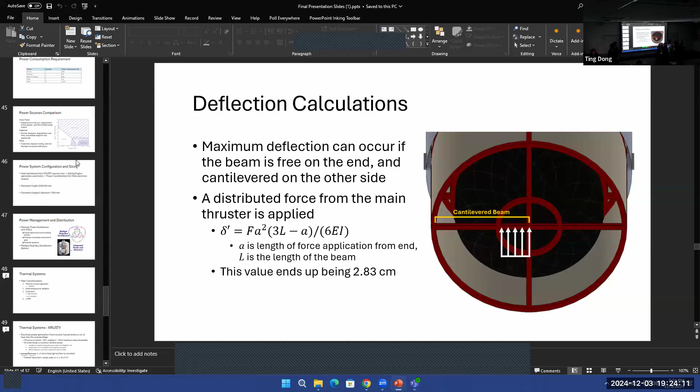One thing - I'm not saying you guys are wrong, I'm just noting in two presentations, theirs and yours, the RTGs - they say it's too expensive, do not consider. But in your power sources comparison, I think you guys chose the RTGs, right? Yes, so justification: for budget leftover, we were able to contribute a sizable amount to the KRUSTY power generator. Also for the solar power and batteries, we felt those had a lot more downsides compared to putting cost into something more expensive, so we weighed it like that. Okay, so make sure you put a very clear trade study to persuade me that RTG is the right choice. And power management distribution.

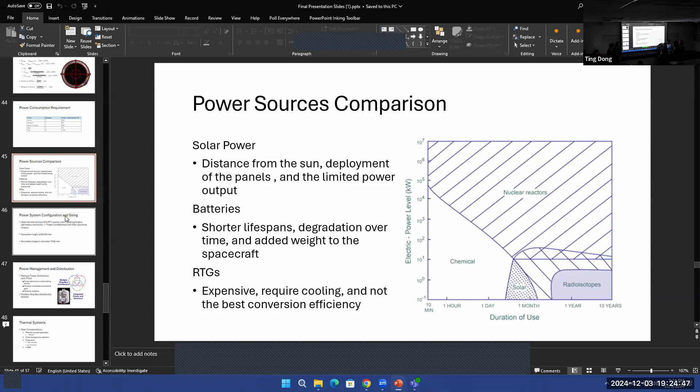The figure on the right - I cannot read anything on the graph anyway, so don't put it there. For the mass estimation, did you guys consider the power system? Yeah, it should be across instrument. Okay, because normally when I think instrument, I think of an instrument for doing the experiment.

That's all the questions I have. Do you have any questions? Do you guys have any questions? No, just one more question.

So for a 3 credits class, do you guys agree that on average each person should spend about 12 hours per week - that makes sense, right? So let's say 3 hours lecture and 9 hours working time. For our class, well it's designed, but I still expect you guys to have spent a total of 12 hours per week in this class. I'm not criticizing anybody, I just want to know each of your estimations - how many hours each of you spend in this class per week. So let's start with you.